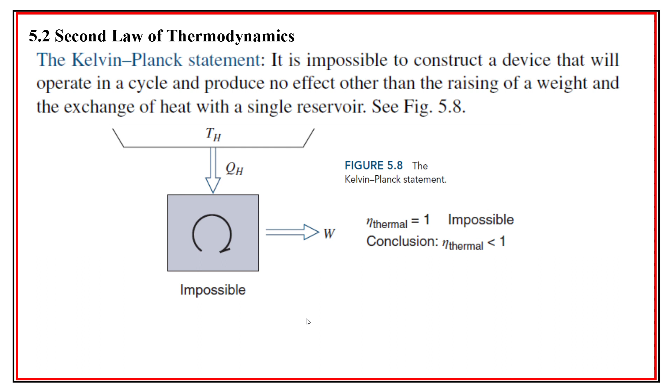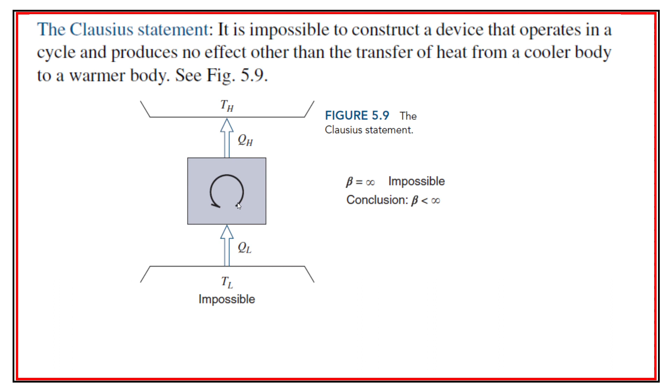The Clausius statement was, "It is impossible to construct a device that operates in a cycle and produces no effect other than the transfer of heat from a cooler body to a warmer body," right? So this is sort of like a refrigeration type of thing, right? It's impossible to have an infinite coefficient of performance. So therefore, it must be less than infinity. We must have some type of work being placed into here in order to do this, right?

So here's two illustrations of this. I'm not sure how much benefit you'll get from here, but this is a demonstration of the equivalence of these two statements, the Clausius statement and the Kelvin-Planck statement, that they're actually the same thing, right? So they're equivalent statements.

The first is a demonstration where we have here on the left-hand side where we're going from a low to a high. This is the Clausius statement where the work is going to be equal to 0. Well, the same thing over here. In order to get the work out of this, we must have some heat rejected, right? In the book it even says we'll leave this to the student to prove. I don't know if that's a very helpful thing to say, but that's what it said.

Also, in another figure nearby, there was the perpetual motion machine of the second kind. The perpetual motion machine of the first kind is one where you can get energy from nowhere, right? So the first law breaks that one down. This is one of the second kind, and I forget what the third kind is. But anyway, what we have is this heat pump where we're taking heat out of the ocean and putting it into a high temperature body, right? So that's on the right-hand side. That is possible as long as we have work coming in.

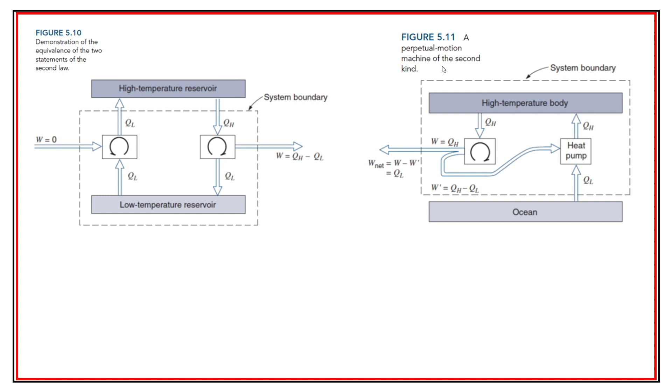But then here on the left, we're taking heat from the source and somehow turning all of it into work. And that work is what we want to get, but we need to steal some of that work in order to get the heat pump to move. Well, we can't do that. That's just not possible. You still need a sink right here. You need to go to a sink no matter what. And this thing can't be your sink. So that's an idea of a perpetual motion machine of the second kind, but it is not possible.

Now let's change course a little bit and go to the reversible process. This is an important concept because we're about to talk about the Carnot engine, and really the point of all of this is that maybe we can establish the most efficient engine that is possible. We can come up with it based on what the extremes are. And in order to do that, we have to come up with processes that will enable us, right? So these are going to be idealized processes, the reversible process. And it doesn't exactly exist.

None of them exist, but we can come up with the hypothetical. And so this is an example of a reversible process, or an attempt to be a reversible process, right? So I think this is actually a demonstration where it's not possible. So this is not reversible. Okay, it says so right here in the caption. It's an example of an irreversible process.

So up here I want to read this. A reversible process for a system is defined as a process that, once having taken place, can be reversed, and in so doing leave no change in either system or surroundings, right? So that's the definition. And let's see if it holds true for this, where we have like a little pin inside of a gas, and this gas is pressurized.

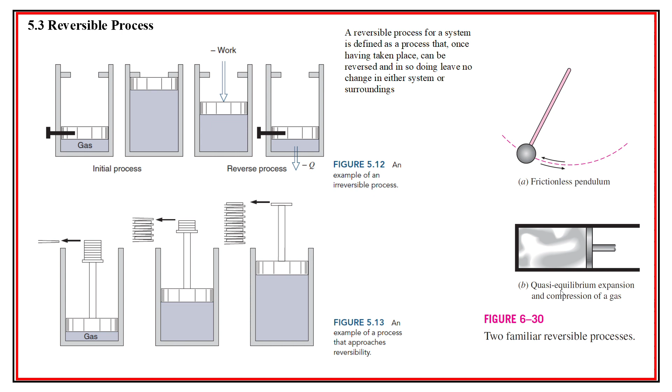So a quasi-equilibrium gas right here. So once again, if there's no friction, we could perhaps push this in, probably doing it slowly, and then let it go, and it would return to the original position, as long as there's no losses. But there are going to be losses. But this would be the quasi-equilibrium expansion and compression of a gas. So these are perhaps two close to being reversible processes, even though they're not exactly.

Here was another one that was in Cengel that I thought was interesting. Reversible processes deliver the most and consume the least amount of work. So we could have the water pushing along this movable bulkhead, right? That's moving without friction, and then we can push it back, right? So it's going to return back to its spot. But if you do it fast... this is for the slow one.

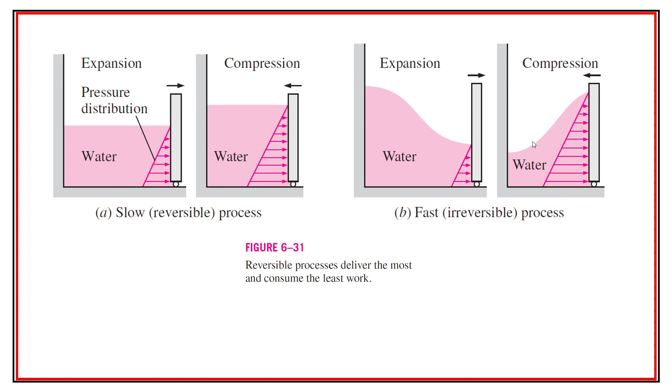If you do it fast, you'd have these waves taking place, and you would dispel energy. I mean, you would lose it. So we have to start talking about factors that render processes irreversible, and we would use the word irreversibility. That's a great word. Friction is one of them, right?

We could see this block coming up this slope right here, being drawn up the slope because of these weights. It gets to the top, maybe this thing stops, and then somebody lets go of the weight. But because of the heat that's generated from this friction, we would come back to our stable position, but they wouldn't have as much weight up in there. I guess maybe that's how you would describe this.

But the idea is that the friction is taking away energy, and it's not a reversible process. In trying to return this thing to its original state, you had to change its surroundings, which is the definition of irreversibility.

Another irreversible scenario is if you had this membrane with a vacuum and a gas, and then you puncture, as they're showing it over here, this membrane. Well, it's going to be hard to put the toothpaste back in the tube, if you will. You need a compressor to do that, and even in the act of compressing it, in order to return it to its original state, you'd have to extract out heat, right? Because the temperature is now going to change.

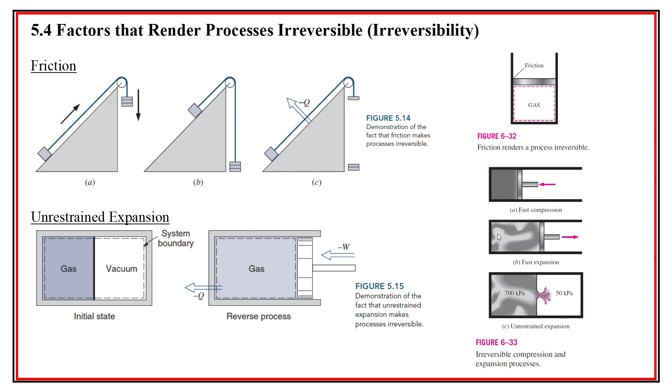So a reversible process means we go all the way back to its original state. But the surroundings are going to be affected by your making the thing the same. Friction renders the process irreversible. These are probably redundant right here. We're showing fast compression and fast expansion. They excite the molecules, so you can't return it back to its original state.

Let's see. You get a heat transfer through a finite temperature difference. So one thing that we will learn is to make a heat transfer in a reversible manner, you must have an infinitesimal temperature difference, right? So you have to go very, very small temperature differences, because if it's a finite temperature difference, large enough between two bodies, it'll be irreversible. So the heat transfer process approaches reversible as the temperature difference between the two bodies approaches zero. Therefore, we define a reversible heat transfer process as one in which heat is transferred through an infinitesimal temperature difference.

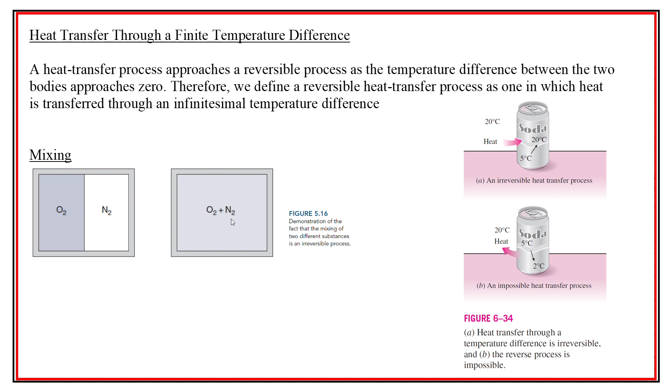I'm not sure, I wish I hadn't written that now. Could erase it. Could erase the whole thing. There you go. Erase the whole thing.

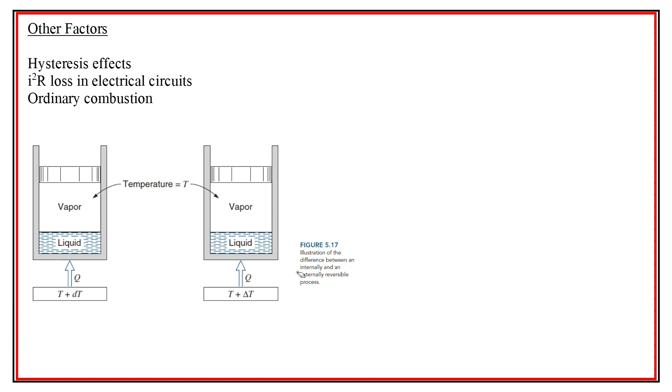So maybe nobody will get to this spot in the video. Sure, that's what we're going to do. We're going to go do some more examples. We'll do some single examples in the next one.